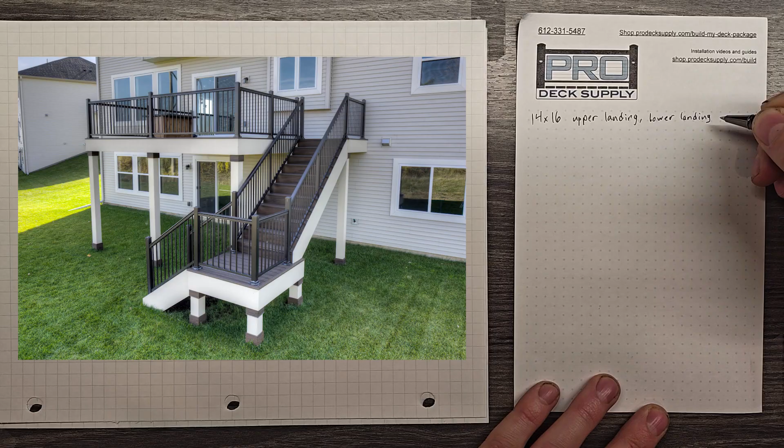We are going to be working on the railing baluster panels for a 14 by 16 deck, an upper landing, lower landing, and a set of stairs between each. The upper landing and lower landing are the two platforms that are going to be at the top of the stairs next to the deck and halfway down the stair, kind of as your turning point around the corner.

And then we are working with a 10-foot elevation, sometimes known as a walkout.

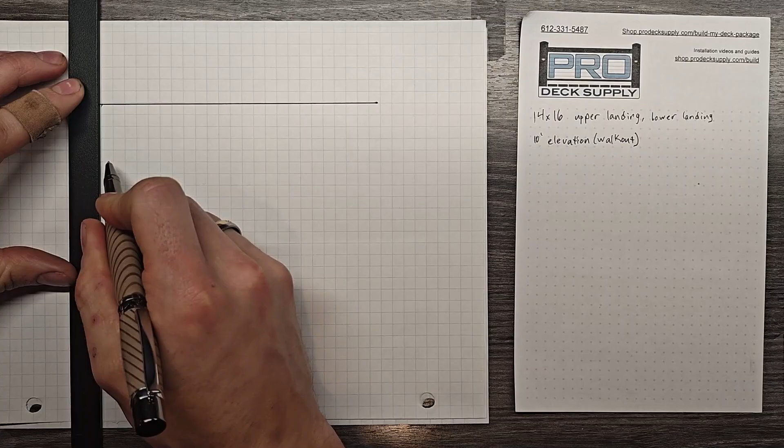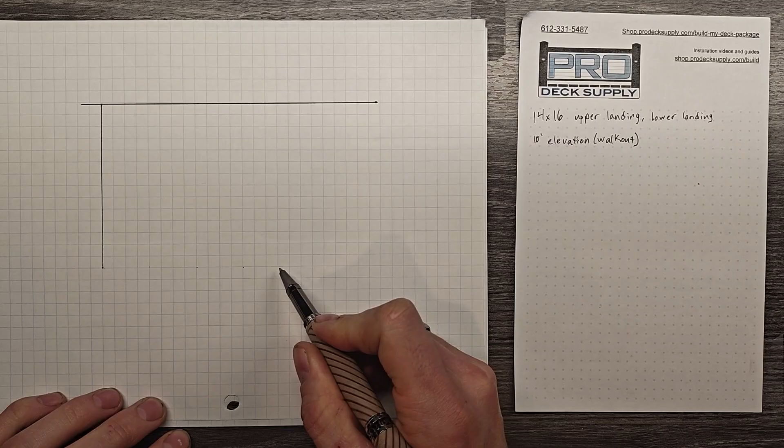So we're just gonna get our house wall in here. And we'll do the 3, 6, 9, 12, 14 feet out. And we have 4, 8, 16, 12, 16. So here is the other corner of the deck.

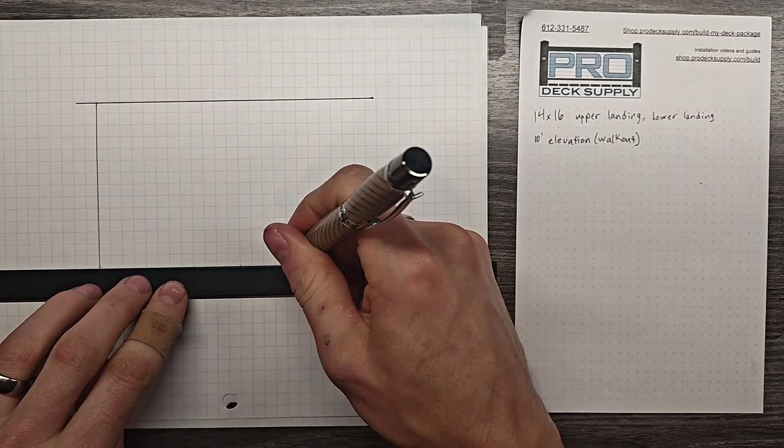And our landing is going to be about 4 feet wide. So that's going to be here. And it will meet the deck right about there. This landing being 4 or 5 feet deep gives us a little shorter of a stair here and makes our lower section of stairs come down a little further.

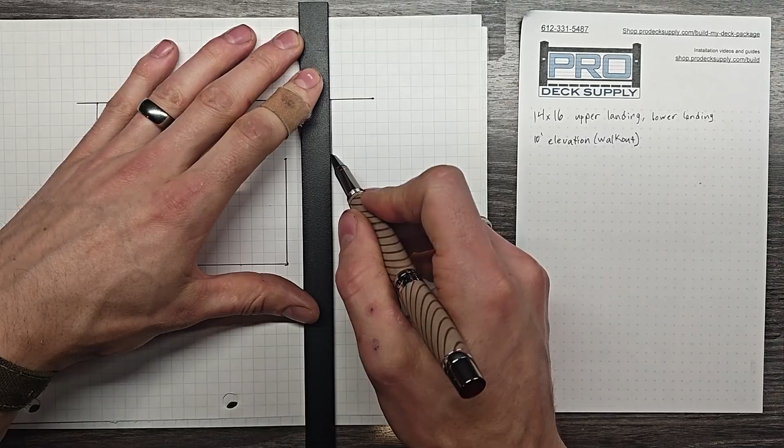Sometimes that last set of stairs ends up being only a few steps long. If you make this set really long, you only get 2 or 3 steps there.

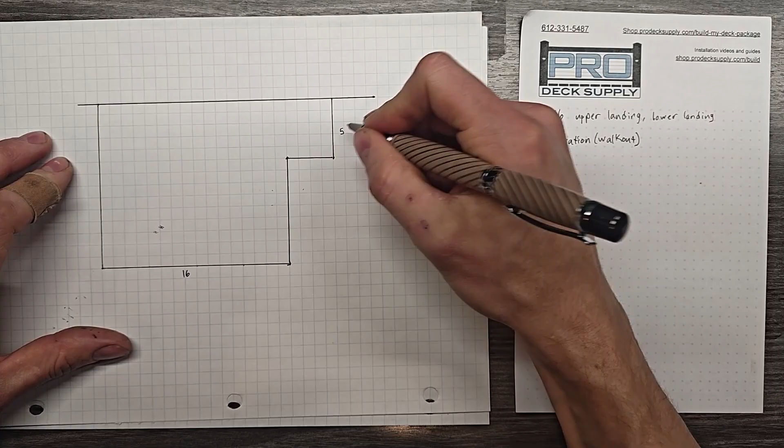So there's our deck shape. This is 16, this is 5, this is 4, and we have 14 over here.

And then, so we're going to have to figure out how many steps are going to have to come down between here and here. Our bottom of our stairs is going to land somewhere in this area because it's got to turn this corner around that corner post there.

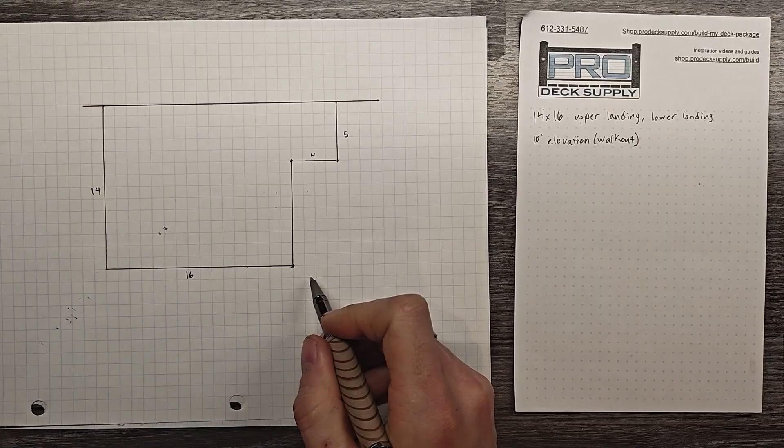So on this deck you can do with 14-foot joists, you can make it far enough where you can do a flush beam and post on the corner, which is nice because you can use that corner post to mount this lower landing to. So our lower landing to connect onto that post is going to go about there to here.

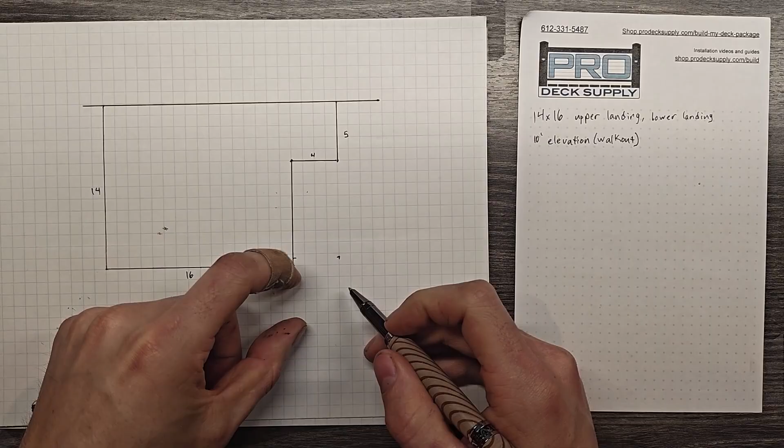And in order for a 4-foot stairway to come down here, which is 4 feet's a really convenient size for stairs, especially with how much inside mounted railing or surface mounted railing post fits on it. It makes the width of the stair just a little bit narrower, but that's still wider than 36, which is a pretty common size that code will require you to have.

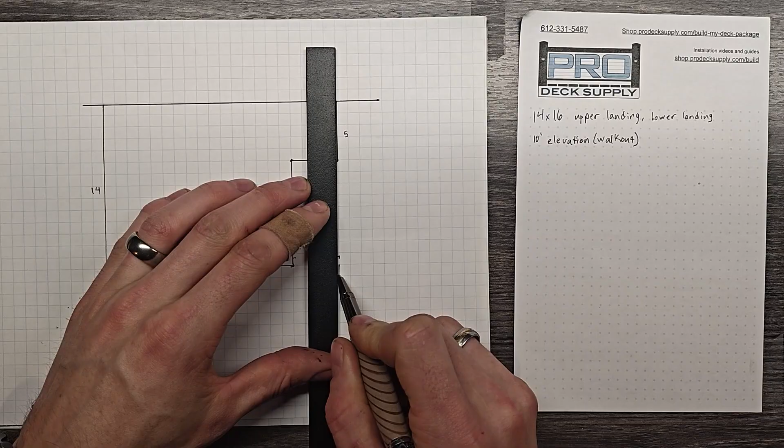So we're gonna go a little past 4 feet here. And since these are the places that we need to have our landings, these are going to drive the lengths of our stairs.

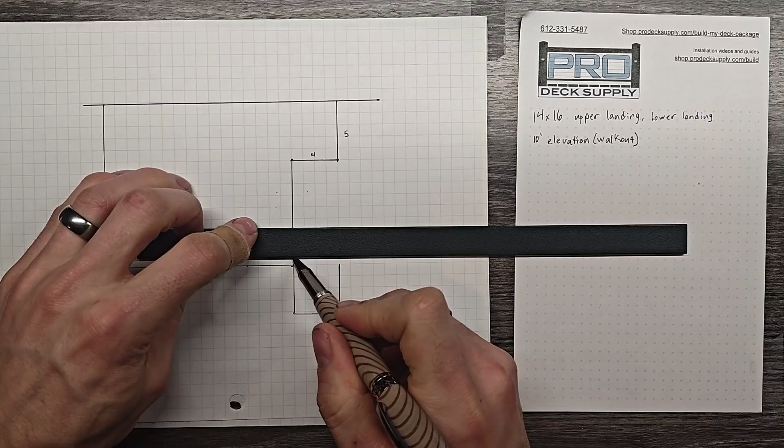So horizontal distance from the top of the stair to the bottom is 1, 2, 3, 4, 5, 6, 7, 8. To get a bottom step to land here, we're at about 9 feet.

And 9 feet times 12 inches per foot gets us to 108.

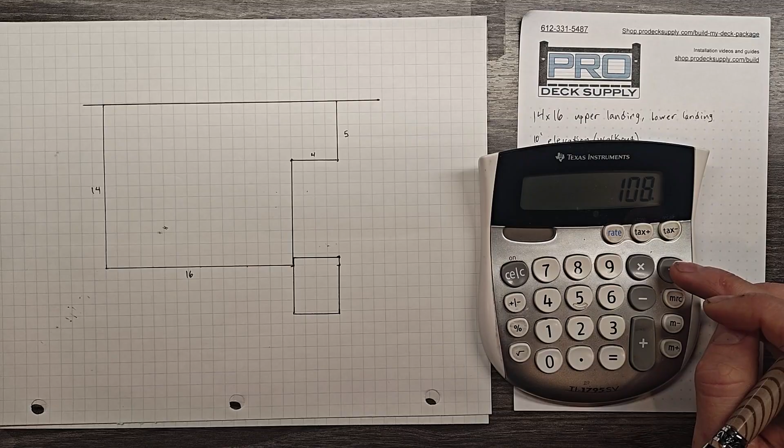And then stairs are often built at around 11 inches deep. It happens to be pretty close to the depth of 2 deck boards. If you put 2 deck boards side by side on that step, it saves you from having to cut a whole lot. And so we will use 11 inches for our tread width.

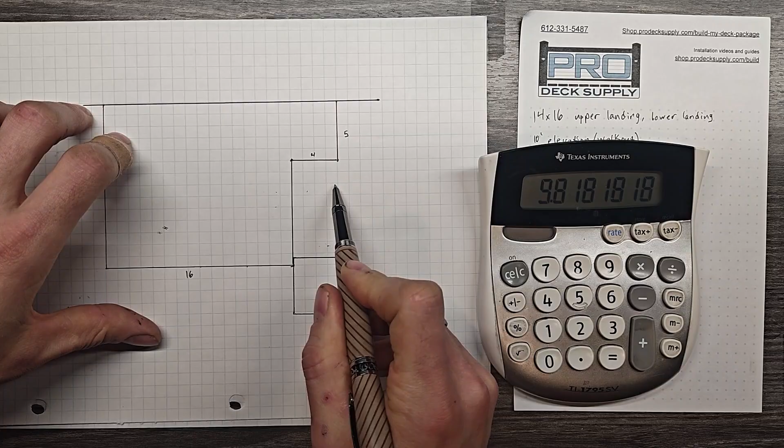So we're going to have to do about 10 steps. And when we see 9 here, that means there are going to be 9 steps from 1, 2, 3, 4, 5, 6, 7, 8, 9. So that will land right about where that line is.

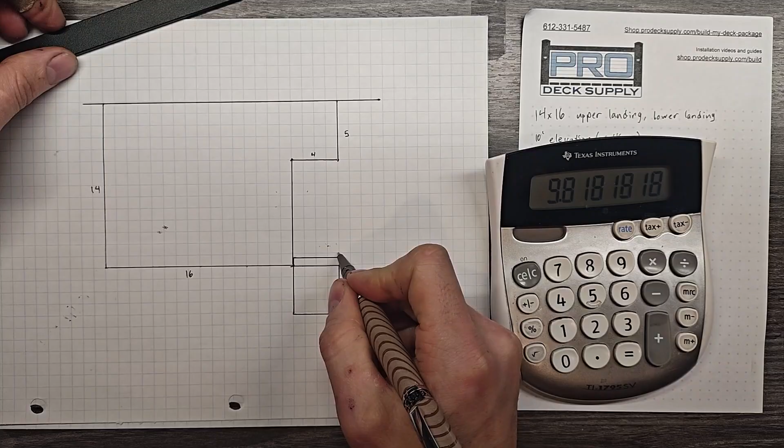So there is the front of our bottom step. And 1, 2, 3, 4, 5, 6, 7, 8, 9. We pretty much make our steps right on these lines. I'm going to draw the side in here.

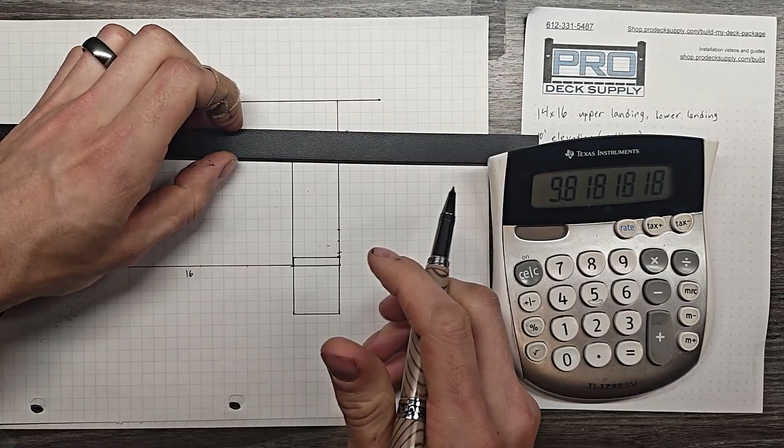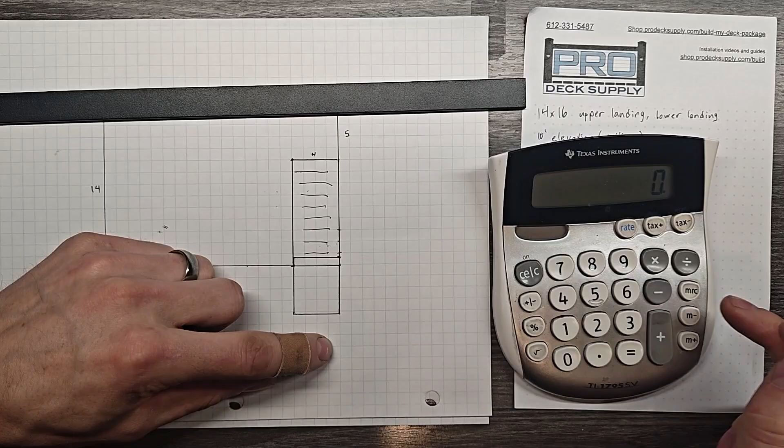So when we have 9 steps, that's going to have to drop, let's see, it'll drop 1, 2, 3, 4, 5, 6, 7, 8, 9 rises worth. So 9 rises, the max can be 7 3/4. 9 times 7 3/4, that's a drop of just under 6 feet.

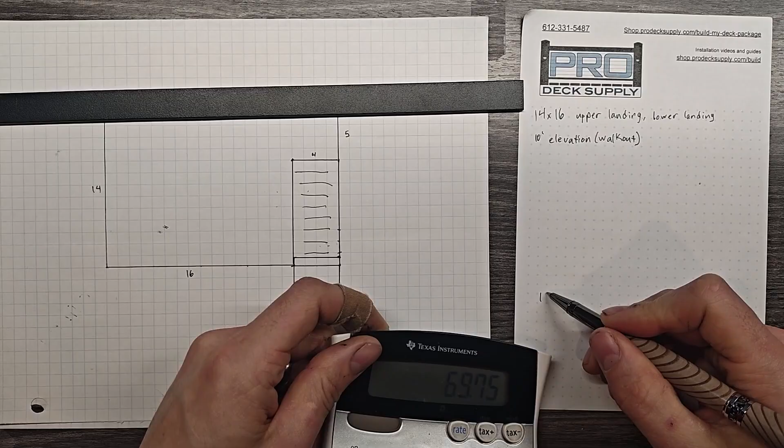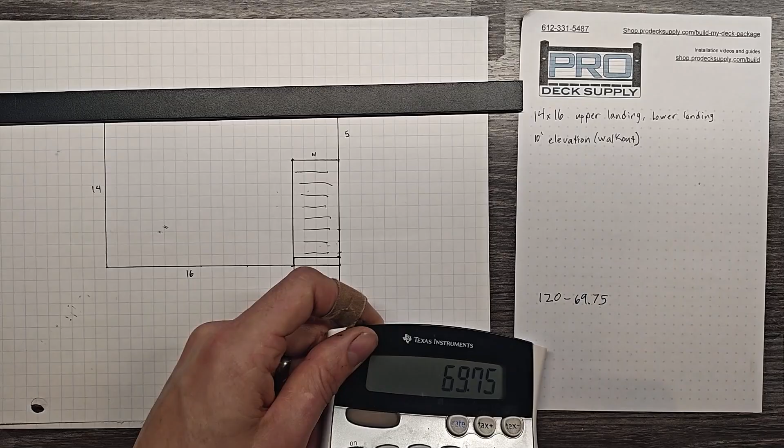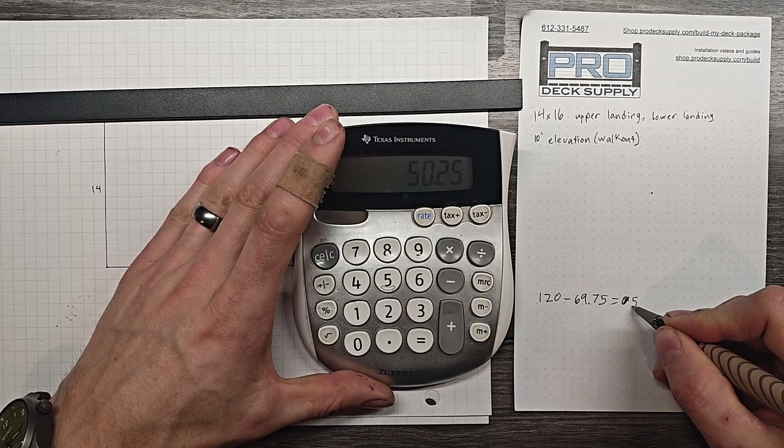So this lower landing here is going to be at 120, which is our full height, minus 69.75. And that is 50.25, or 50 1/4. So we'll use this number later.

That is in inches. We could convert back and forth between feet and inches, but it's a lot easier to just stick with inches, so that's what we're going to do.

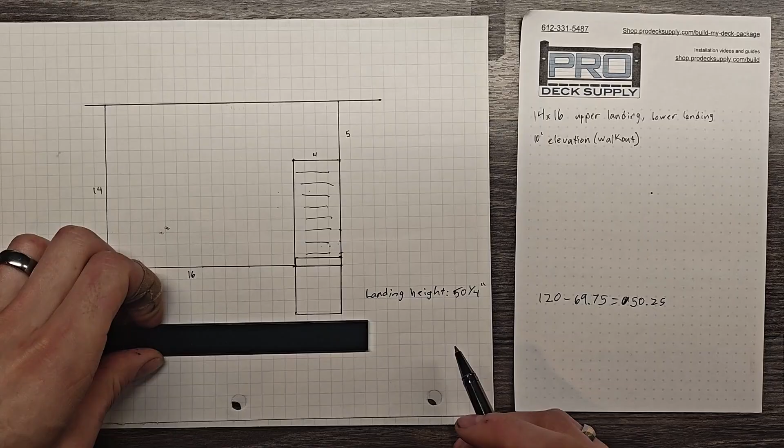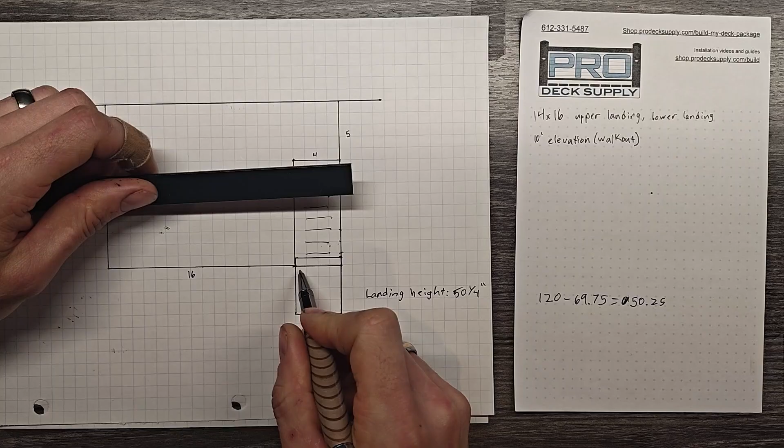So we got our stair in there, and then this lower stair is going to be 4 feet wide. So just on this side of the line, 1, 2, 3, 4. Our stair is going to start right about there.

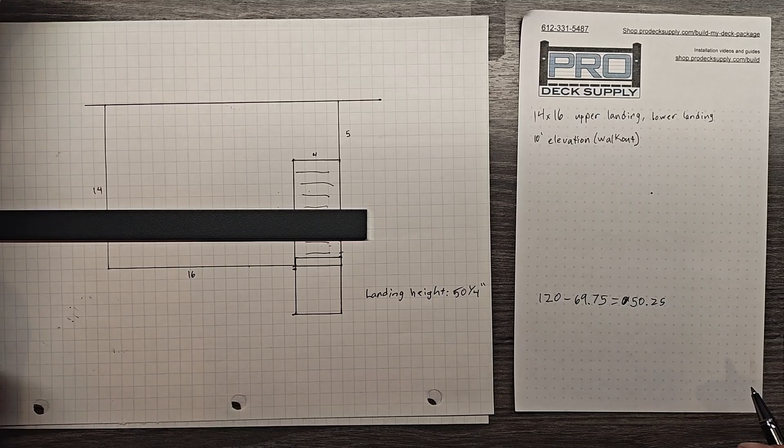And then that 50 1/4 number, that's the remaining distance that we have to drop down. So 50 1/4 divided by the maximum size that our stair rises can be per code, is 7 3/4. So we don't want to go with 6 steps because they'll be taller than 7 3/4.

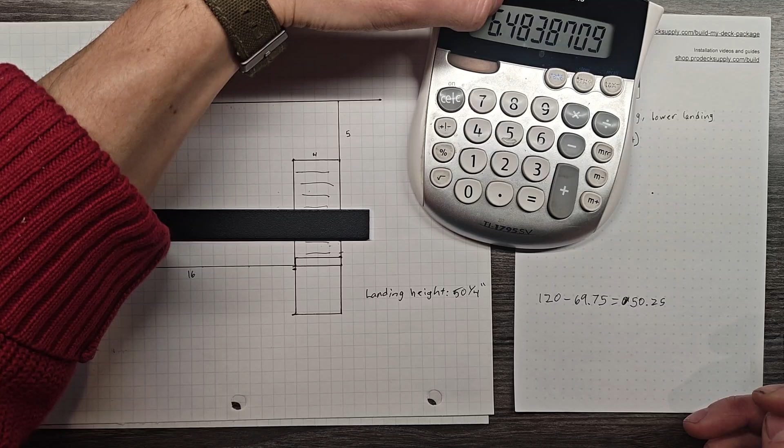So we're going to go with 7 steps. So we're going to divide that. This number is not helpful to us right now, but it would give us our rise height. Divided by 7, that's going to be about just under 7 1/4.

And that is only for the lower section. So that was 7 rises.

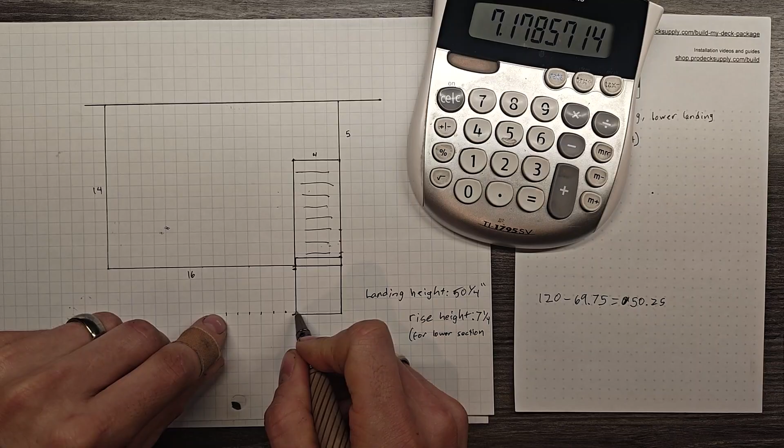1, 2, so this is technically our first rise, even though it's not a step, we'll have to go down once and then down again. 1, 2, 3, 4, 5, 6, 7. So when we step onto our first step, second, third, fourth, fifth, sixth step, that actually gives us 7 rise, even though there's only 6 steps.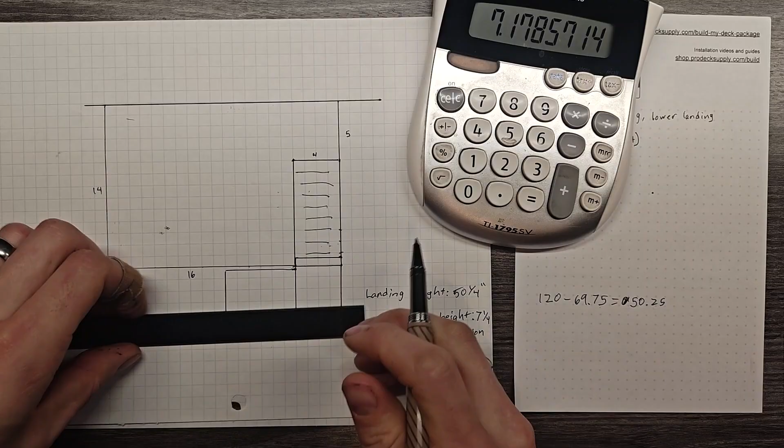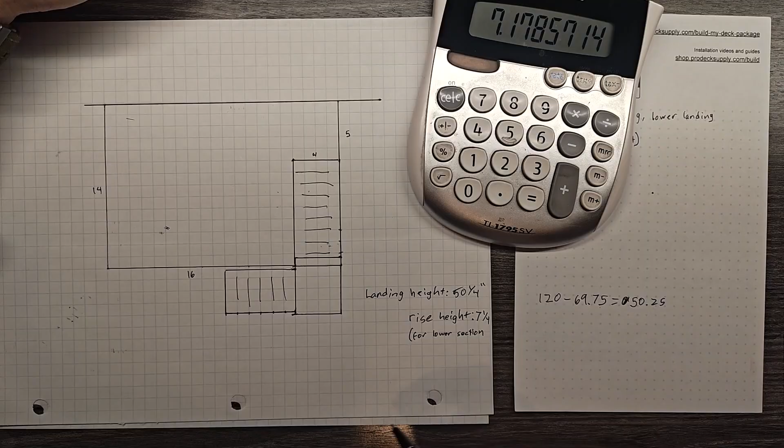And we'll draw in our stair outline here and do our casual stair lines there. So now we are on to...

We know where our stair is, we know the heights of each and the number of steps, and then we have our deck size. So we are going to start drawing posts in here.

You can mount your railing panels to the house, but when you're working with siding and it's an uneven surface, your wall mounts may not mount anything that's not perfectly vertical. 99% of the time we just mount a post right next to the house, and that's what your rail panel connects to. It looks clean, it doesn't interfere with the waterproofing on the house, and it still matches the rest of the railing.

So put a post at each house wall, and then we know we're gonna have to have posts at each corner of the deck, and then just figuring out the spaces in between the corners is when it gets a little more complicated. So then when it comes to this post here, we need to have the post on this side of this line here because it's going to be in line with the stair rail coming down here.

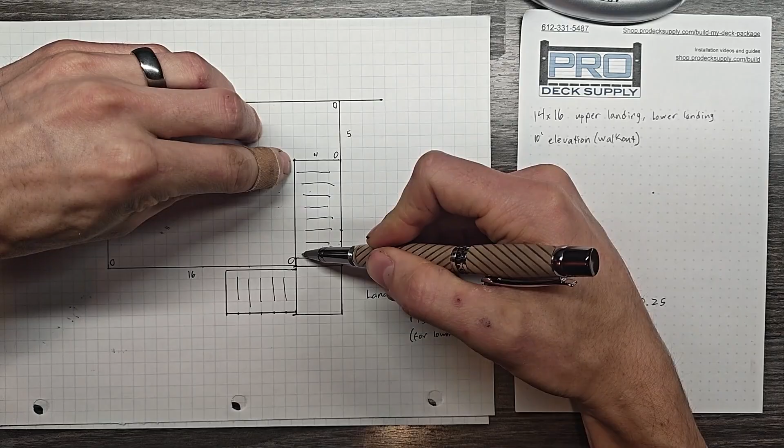So we need to put a post here, but we can't use that to mount this rail to, that's going to be on the deck. So we have to add another post there.

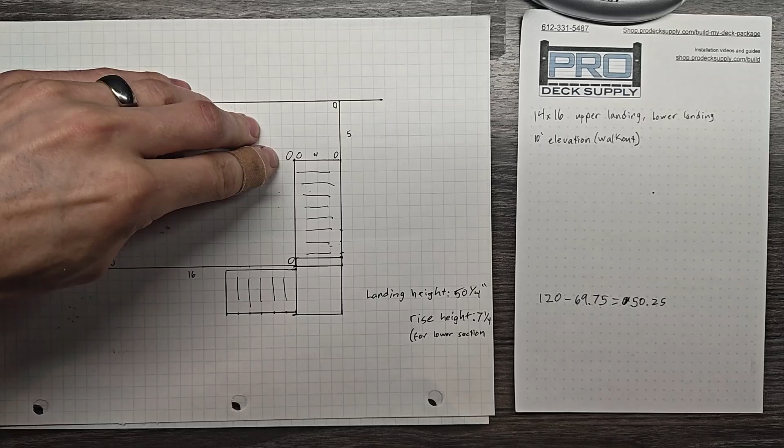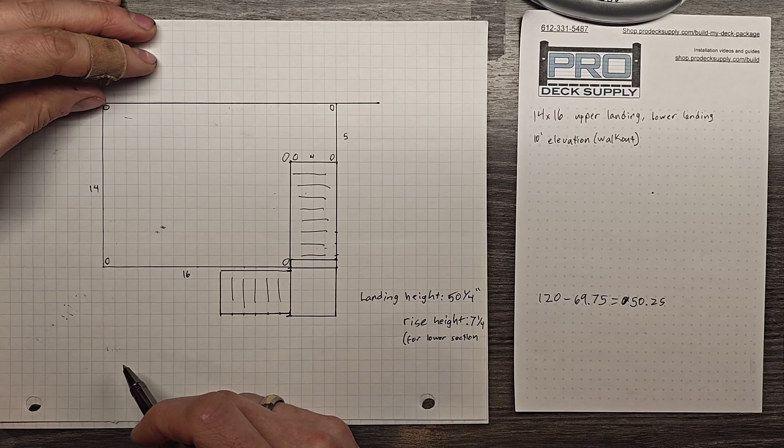So when it comes to railing panels, they are nearly always available when you're looking at metal rail panels like aluminum or steel. They're almost always available in 6-foot and 8-foot lengths. Back when it was wood rails, it didn't really matter how long panels were because you're just working with 2x4s. But when it's metal, we have to try and be as efficient as possible and split up all the distances according to getting the most of our panel and throwing away as little as possible.

So when you have 6s and 8s, you will usually round down and cut off a little bit. Like for this 5, we might have to work with a 6-foot panel.

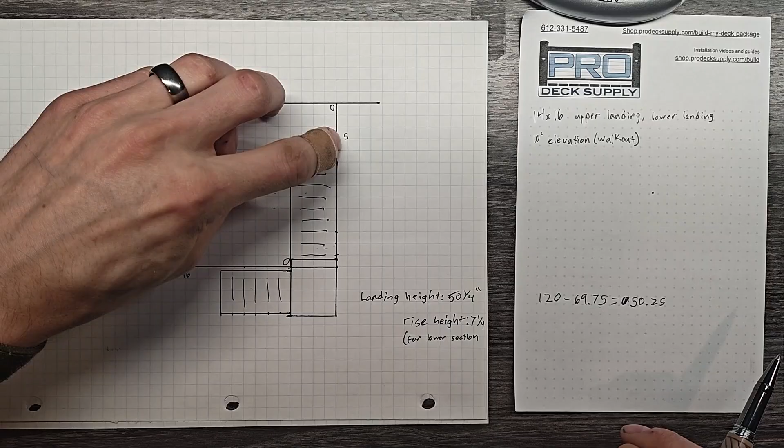And although we sell ultra locks in panels to the nearest foot, Westbury makes 5, 6, 7, 8, and sometimes 4-foot length panels. That does end up being a little bit more efficient, but for the sake of this, we're going to go with 6s and 8s because that's what will work for nearly every railing manufacturer.

So on this 14-foot side, this is where we're probably going to end up with a little bit of scrap. And you might say, well, let's take 2 6s, leave those full length, but then you're going to be left with 6 plus 6 is 12. 14 minus 12 would be a little 2-foot section here. And that is not going to look great.

It might install faster, but we want to make things look as symmetrical as possible. So especially when that 2-foot is going to either have to be a cutoff from a longer panel, or we're going to have to buy an entire new panel for that, it's just going to be easier to get 2 8-footers and trim them down to 7 here. So since we can do that in 2 panels, we know that there's going to be 2 spaces, which means there's going to be 1 post in the middle.

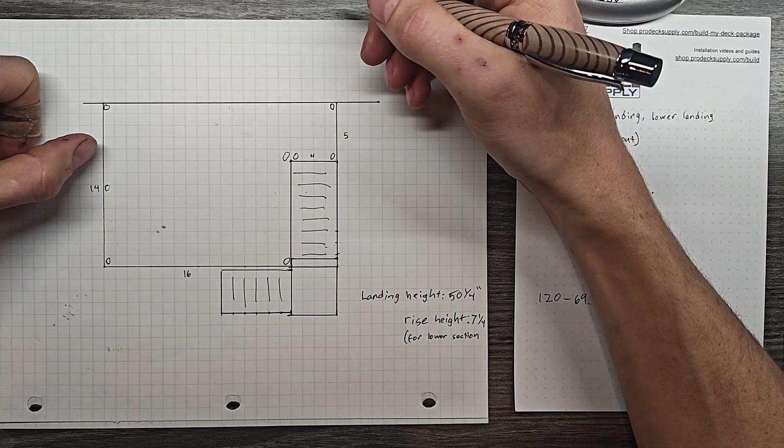So one post in the middle, these will end up being cut to 7 feet, but we're going to need to buy 8-footers for that. So for the sake of figuring out what we need in our materials order, we're going to put 8-footers in there.

And then on the 16-foot side, we're going to do something similar, but we won't have any scraps. The two 8-footers will span 16 feet, so that's 2 panels. We'll put one post at about the middle, and that will be another 8 and another 8.

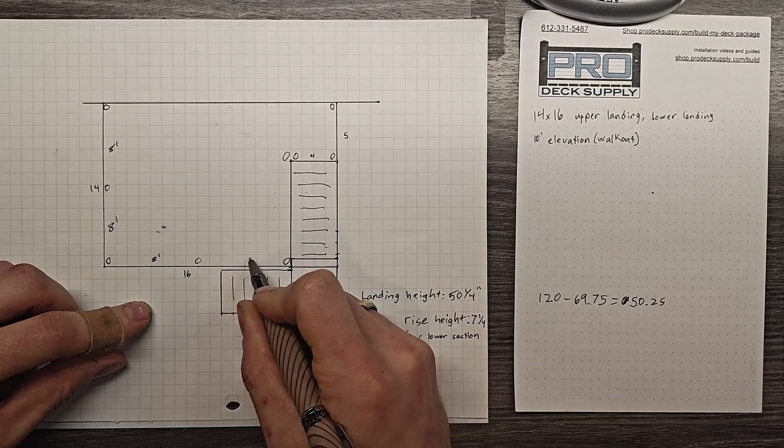Then this side we're going to have to do a little bit of math. Not too bad, but we know the distance from here to here is 14. This 5 feet here is going to take up this space, and so we'll have about 9 feet of space left. If it was 8 feet, I'd take a look at how much this post and this post take up and see if we could make an 8 work, but we're at 9 feet.

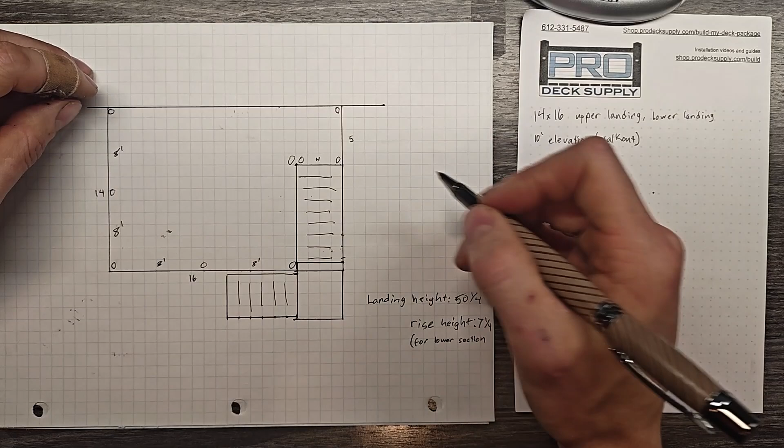Nobody makes a 9-foot panel, so we'll have to split it in 2 and put a post in the middle there. 9 feet divided by 2 is 4.5, and that's not a great distance. That's when manufacturers like Westbury, or us with our UltraLox, can do a 5-footer and only have to cut 6 inches off. But the most efficient thing for us to do is put 6s there—you can do a 6-foot and a 6-foot.

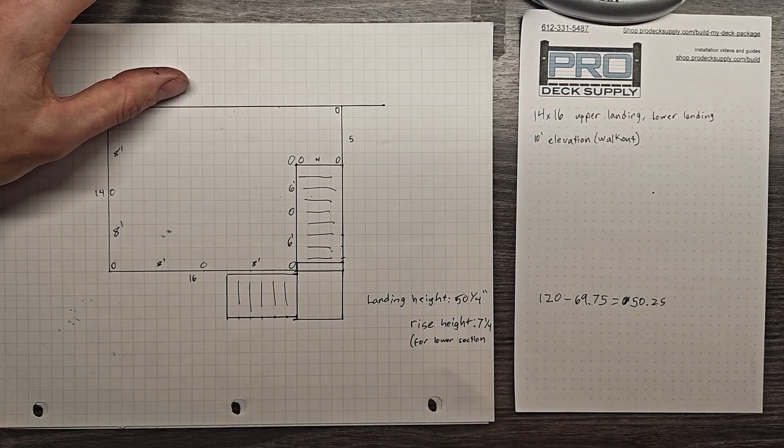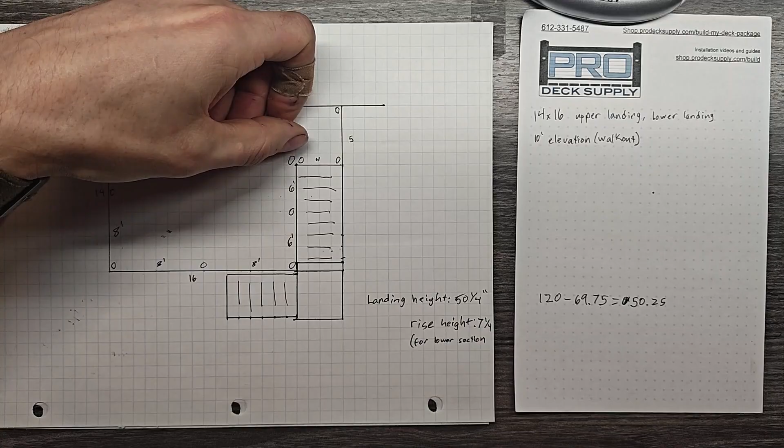So there we go, we've got all our deck panels figured out. And these 2 posts are going to be mounted to the deck surface, not onto the top step. So this top step is actually going to be a drop down.

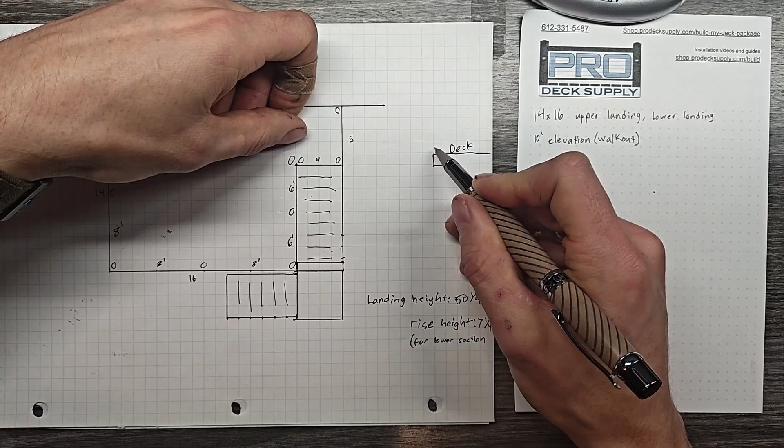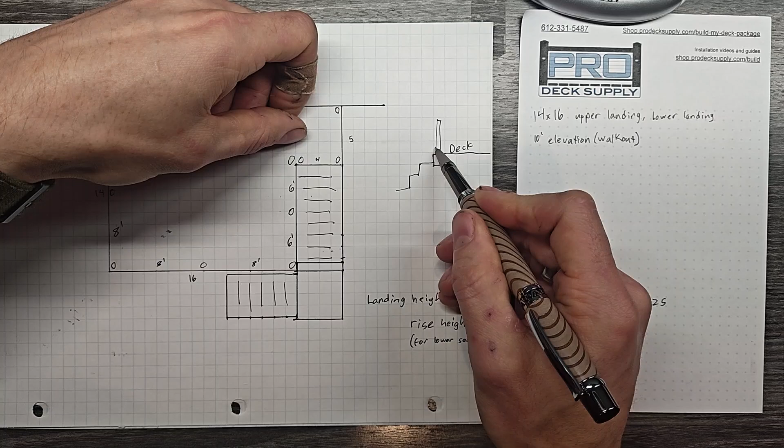So for example, this would be our deck. And then when we do our steps, we're not going to make our first step even with the deck, because that just adds another post we'd need for railing, and it gets complicated. So instead we'll drop our first step by the same distance as the rest of our steps, and this is where our post would go. That way our rail can go down like so.

So now we know we have our top of stair posts. This is actually our bottom step here. This little line here is just the back of our landing that's going to be beneath the stairs, so we're not going to worry about that.

Mounting a post to the bottom step here or here can be done, but we're going to bring it down and mount it on this landing area, because that makes it usable for the panel we have to put here and here—this is still 50 1/4 off the ground, so we'll need railing here. So we'll put a post at the bottom of the stair, and that will continue the rail around our landing to make sure that's protected, so you don't come running down your stairs and shoot out the edge. We don't want that.

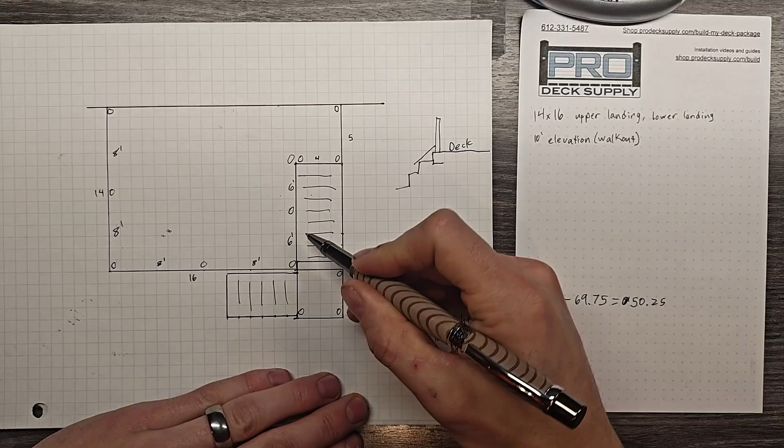So this post here—if you've got a really funky stair and you haven't built it yourself and weren't able to coordinate the location of this lower stair section, you may end up needing 2 posts here. But when your stair comes down and this stair is located closely enough to it, we can put it right here and have it be in line with these panels and these panels.

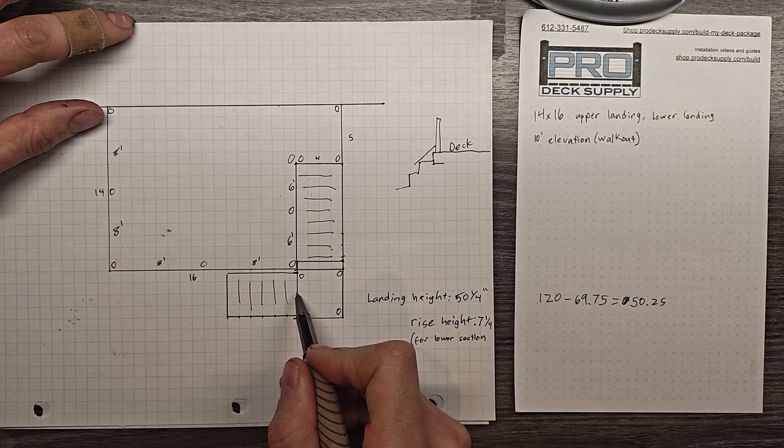And then on this stair section here, the distance between this edge of this step and the edge of this step—you can use the Pythagorean theorem to figure out that distance. It's going to be close to 13.5 inches. So when we have our rail going from here to a post at the bottom, which I'm just drawing now, we don't want to put those on the ground—that's not nice to mount. We put it on the bottom step instead.

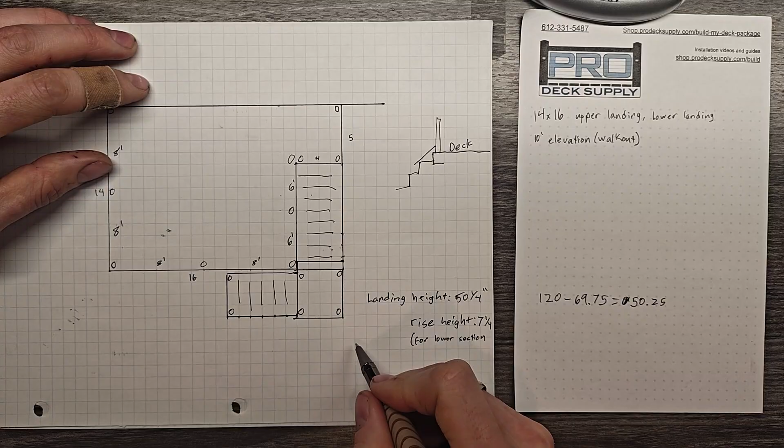So to go up that number of steps, we'll have to go 1, 2, 3, 4, 5, 6 times that 13.5. 13.5 times 6 is going to be 81 inches. That is just shy of 7 feet. 7 feet is 84 inches.

So this is going to have to be a 7-foot panel, and that can be a 7-foot panel. But if we're working with our 6s and 8s only, we will have to round this up and make this an 8.

So then this here, we know that this stair is 4 feet wide. Since these posts here will subtract a little bit of distance from that 4 feet, about 4 inches per post. If you're working with a 3 or 4 inch post, that will subtract 4 inches, and this will subtract 4 inches, which will give us a little bit of breathing room if we wanted to use a 4-foot panel.

Since we can't use 4-footers and we only have 6s and 8s to choose from, we can take an 8 and cut it in half, put half here, and put the other half here.

So sometimes the 8-foot panels that you'll get are not exactly 96 inches, and they'll sometimes be a little shorter. So that extra breathing room we got from these 2 posts here narrowed this to about 42, 43 inches, which gives us just enough breathing room to make 2 42-inch panels. That adds up to 84.

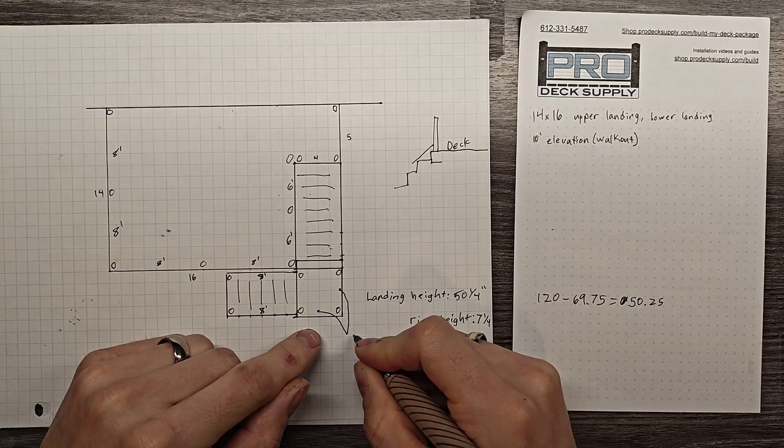Sometimes you're going to need to adjust the baluster spacing on the ends so you can have your baluster centered. So we're going to do this panel and this panel as an 8-foot.

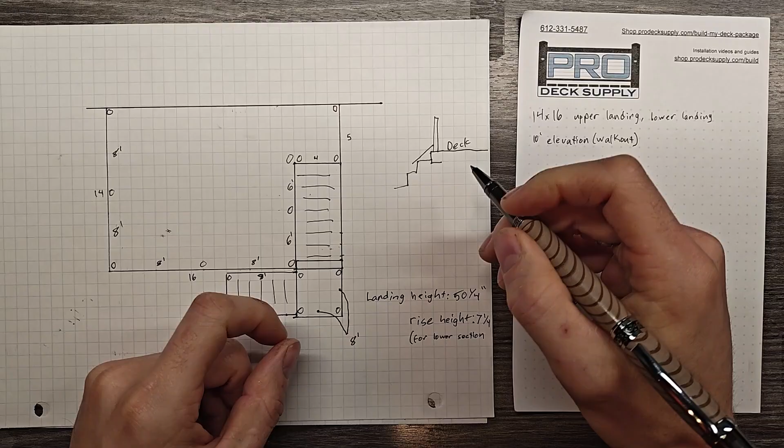So now as we go to our long stairs here, we are going to go down 1, 2, 3, 4, 5, 6, 7, 8, 9, 10 steps to hit this post here, which is on the landing level. So 10 steps is 5 steps and 5 steps.

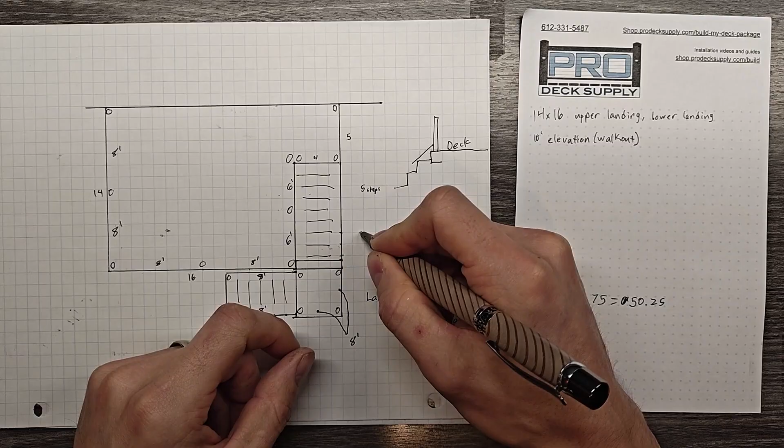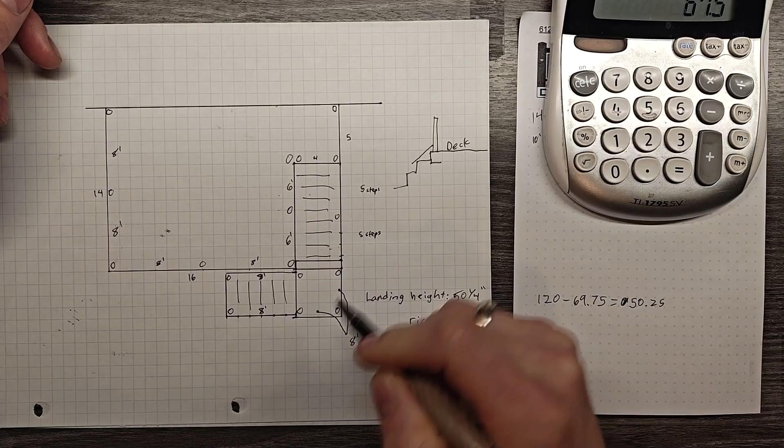So going down 5 steps, we'll put a post on that 5th step and then go down 5 more. 1, 2, 3, 4, 5, 1, 2, 3, 4, 5. Post on either side because we'll need panels over here. So with this being 5 steps at 67.5 inches, that's 5 foot 7.5.

We should be okay with a 6-foot panel, even if it's a shorter 6-foot panel. So 6 foot and 6 foot.

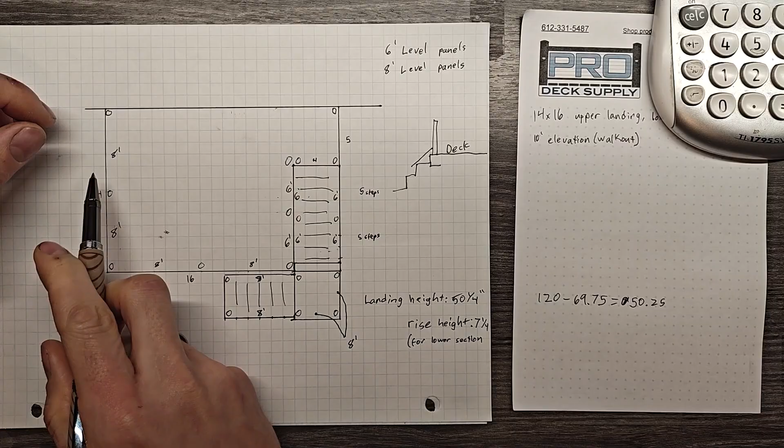So of our list, we have panels on all our level sections, and we have stair panels on all of our stair sections. We have posted all the corners. Every one of these panels is positioned between 2 posts, and we'll end up needing to get an extra mounting bracket hardware kit for this 8-foot that's going to get cut in half.

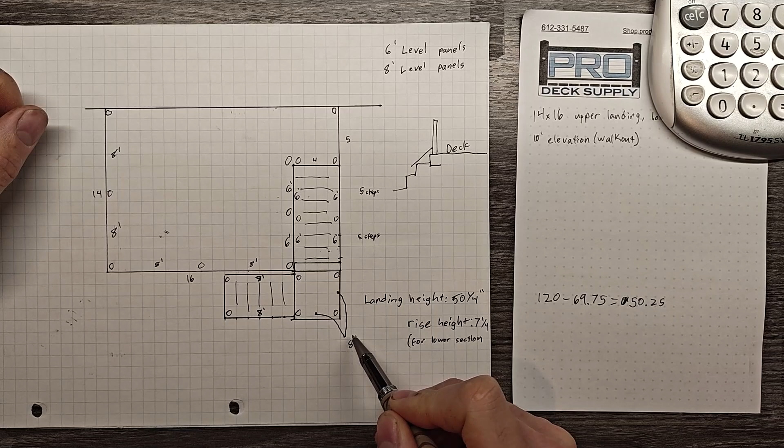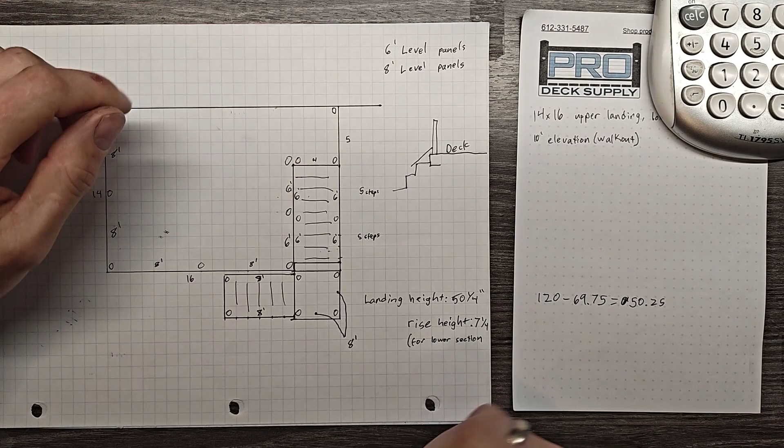Because nearly every panel that you buy of metal, whether that's Ultra-Lox, Westbury, Keylink, Barrett, Jam, Fortress, Trex, any of the above, they will usually come with one set of mounting hardware. One set of mounting hardware will get it mounted between one set of posts. But if you're making two panels with it, you'll need another hardware set.

So, level brackets, and then stair panels. All of our stair panels will be used as full stair panels, so no extra hardware needed for stairs. And then for posts, we'll need regular height posts, which are usually going to be between 36 and 38 inches.

Most of the time you'll see them as a 36-inch post and used for residential rail. So 36-inch regular post.

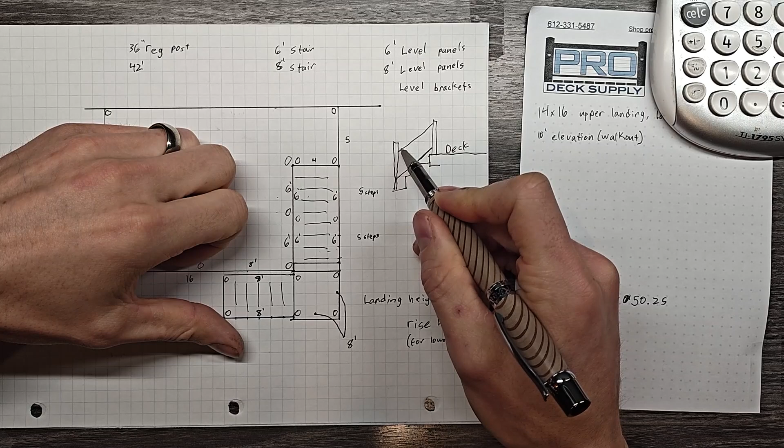And then when you need a post at the bottom of a stair, you have rail coming down at an angle. So let's pretend that this is my example. When you have a rail panel coming down a set of stairs, its regular height is around 36, 37 maybe.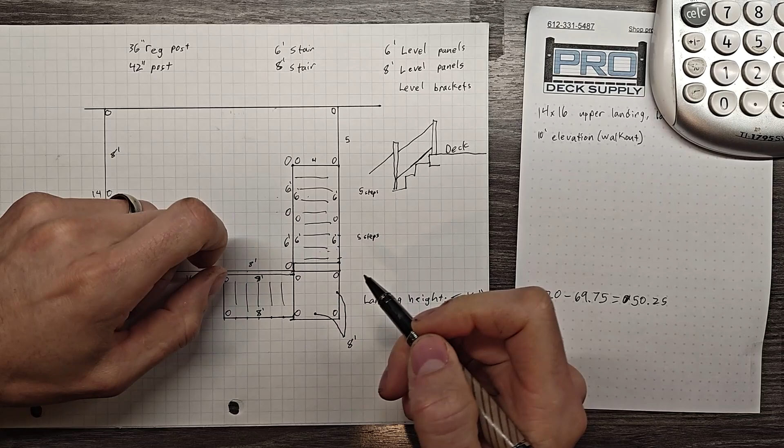When it comes down and hits the top of a stair, because it's at an angle, you'll need some extra height on this post, and that post is nearly always going to be a 42-inch. So that's at the bottom of the stair, or anytime you have a stair rail hitting it coming down at an angle from above. So here, these two posts are just in a section like this one. So these are going to either need to be tall posts, or a special kind of crossover post.

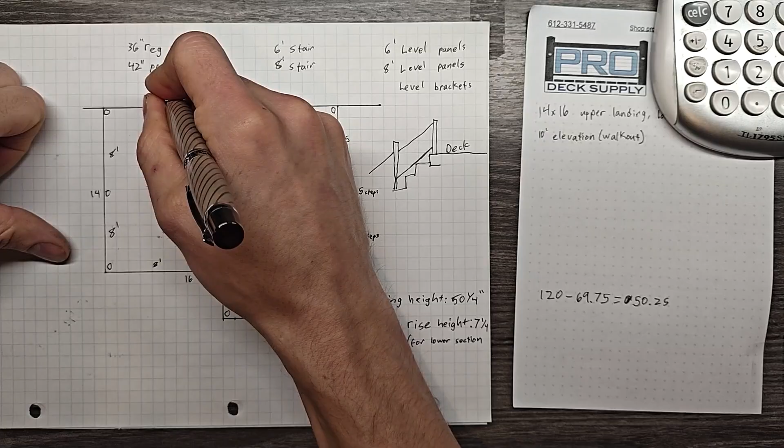We're going to do crossovers instead of the regular tall posts. The reason we do a crossover post is code usually says that when you have a rail panel this long, it has to have some sort of continuous graspable handrail that you can hang on to as you're walking down that stair.

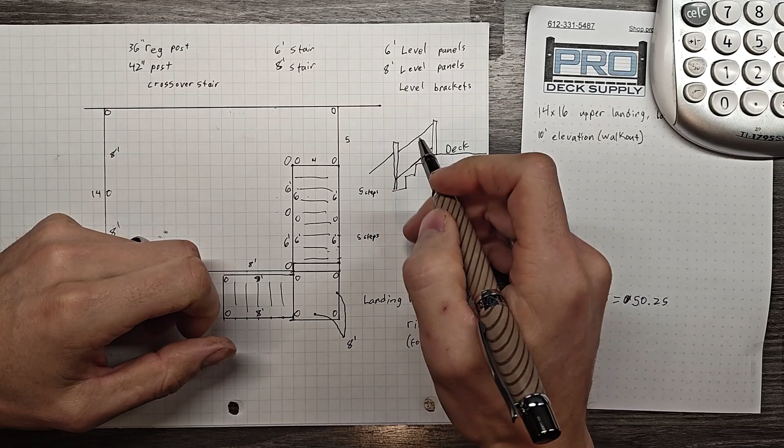And if this top rail is approved for the right size and shape for a continuous handrail, you can make this a continuous post that blends right into the top rail and keeps that top profile going. So there may be a cut there, the bracket may be mounted underneath or inside or outside it, but you're making this a continuous handrail and saving yourself the $200 or so that you would have spent on the graspable handrail going down the side.

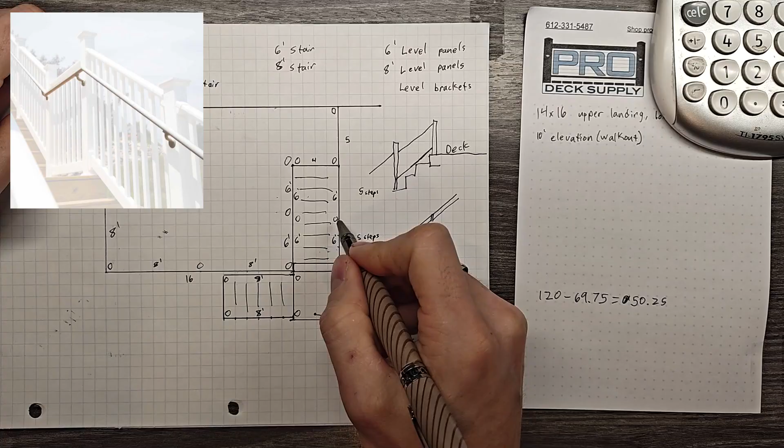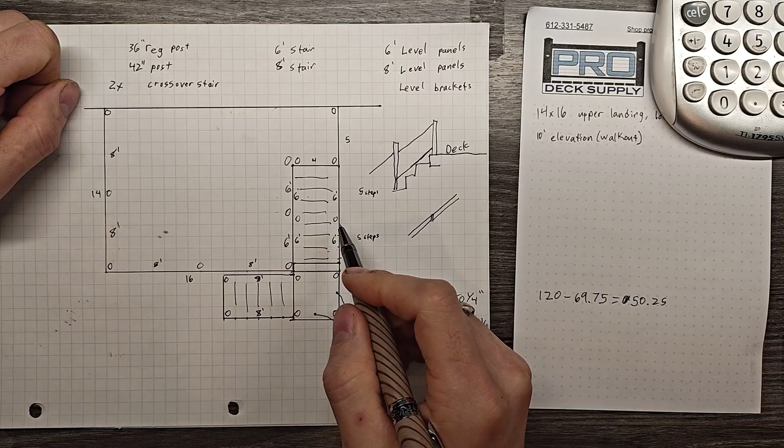So here we're going to do two crossover posts. Sometimes those brackets come separately, sometimes they come with it. You'll just have to go by the manufacturer. Ultralox's 42-inch posts will come with that bracket, because that's where they're designed to go. And with Westbury, you'd buy a tall 42-inch post and add a stair crossover bracket.

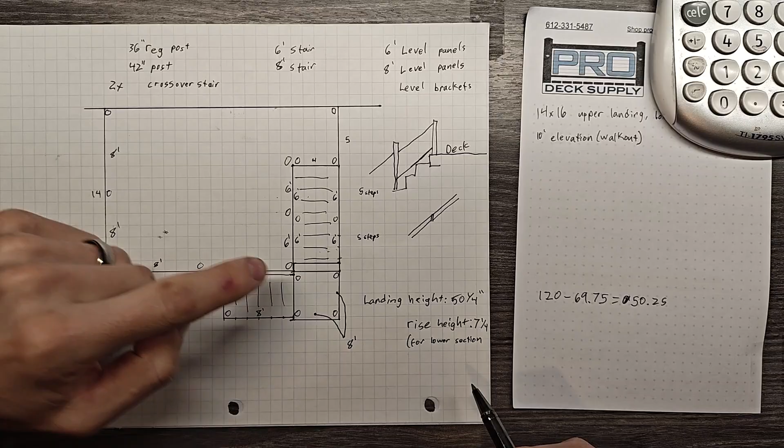So we got two of those posts. And then for regular height, this is a horizontal rail section, a flat surface. This is also a flat surface. So when we get our level panels, we are doing 5 here. That is actually a 6. So 6-footers, we have 1, 2, 3.

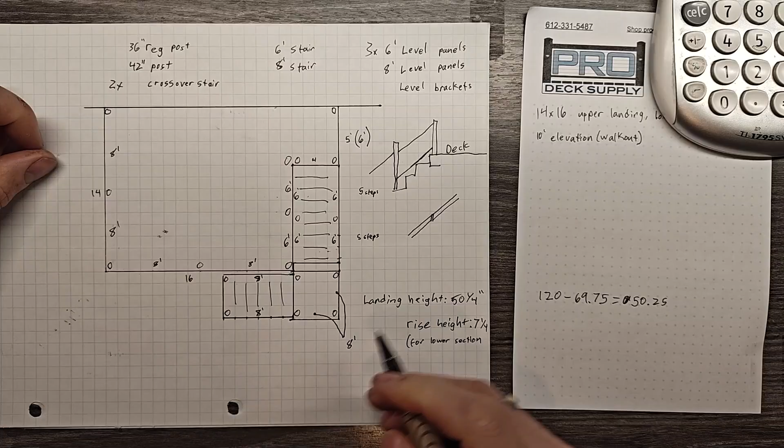The rest are 8s. So we have 3 level panels. And then for 8s, we have 1, 2, 3, 4. And then this is our 5th, which ends getting cut in half. And then don't forget about that level bracket set.

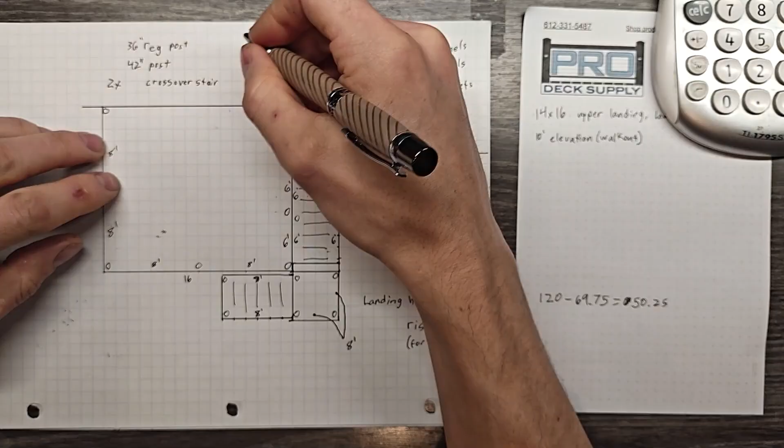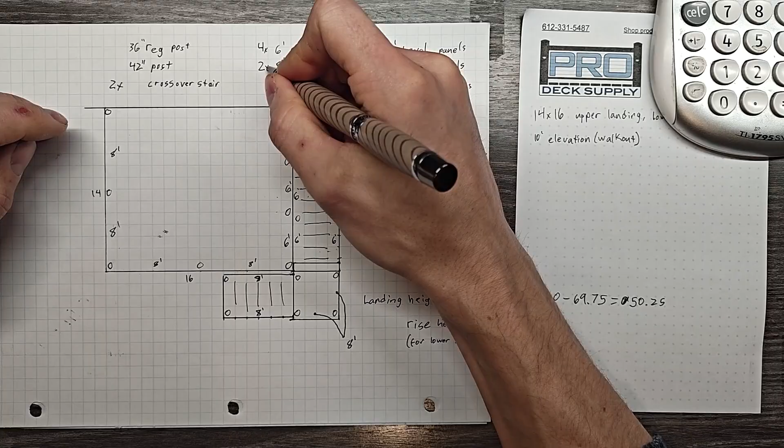And then we have stair panels, 1, 2, 3, 4 6-footers. And these 2 8-foot stair panels. And then when we get to posts, we're going to have 1, 2, 3, 4, 5, 6, 7, 8, 9, 10, 11, 12.

The reason I only counted these two is because none of these posts are going to have a stair rail coming down at an angle like this post here. This one's between two level panels, and this one is between a level panel and a stair coming down from it rather than down into it.

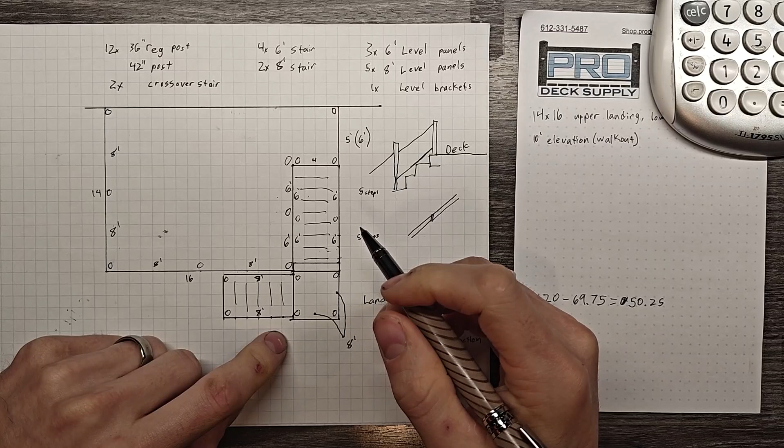But these two posts here are going to be at the bottom of this stair section, so those will need to be tall posts. So we need 2 here at the extra tall height and 2 here, which gives us 4. 1 through 12. So that's 4 tall posts, 2 crossovers, and a quick double check on our panels.

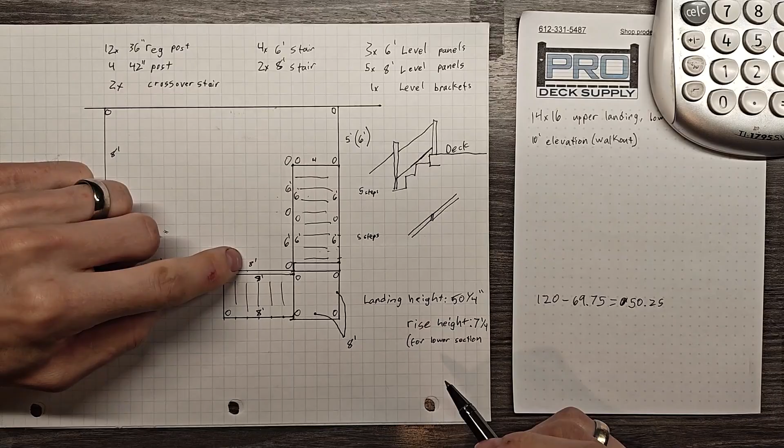We have 8 here, 6 here for a total of 14. 1 through 14. So that is all of our panels, extra brackets, stair panels, and posts.

And if we are needing to figure screws to mount those surface mount posts into the deck, there's usually 4 screws per post. So if we have 12 plus 4 plus 2 posts, that is 18 times 4, which is 72 screws.

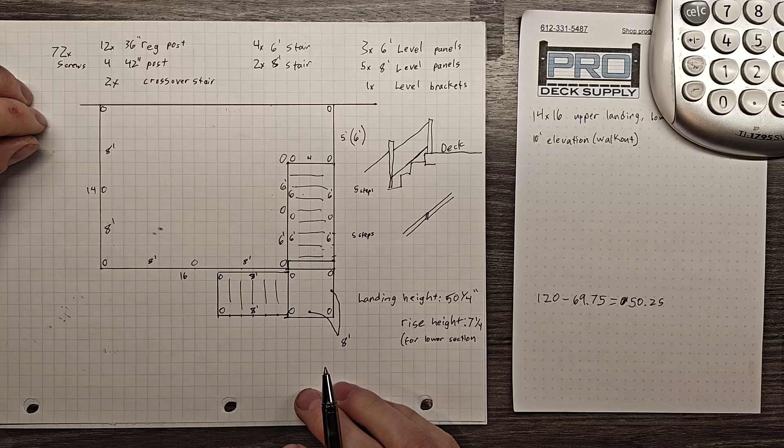We include those screws with our Ultralox posts, but that's something we do custom. Nearly every other panel you get is going to come with no screws, and you'll have to add those. Those are usually going to be the modern equivalent of a lag bolt, 5 inches or 6 inches long, so it can go through the decking and into the deck framing.

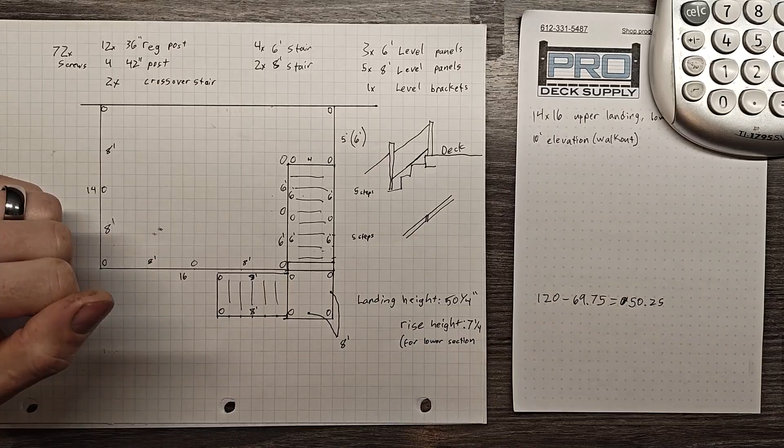So we have all our panels, we have all our posts, we have screws needed, we have everything we need to get that rail mounted, get those posts mounted, and as long as you don't lose anything, you shouldn't need anything else.